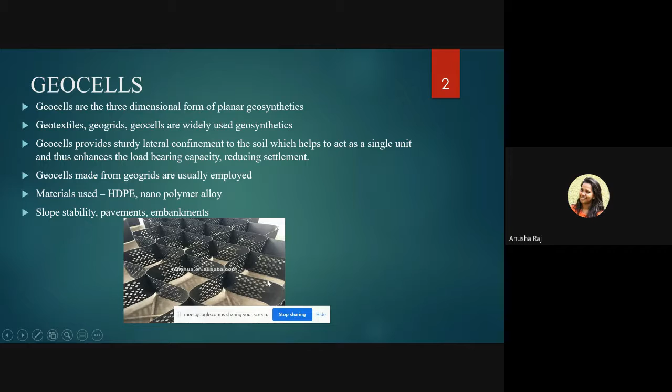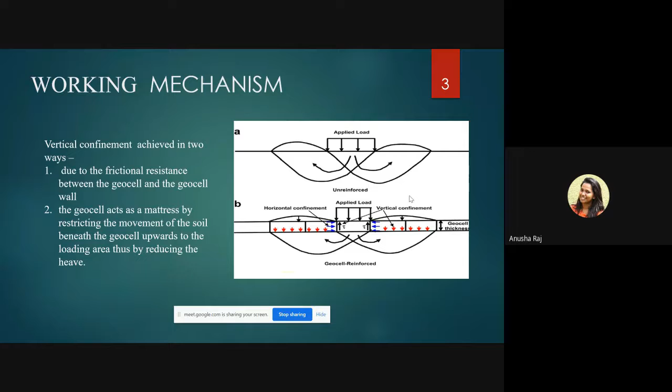The working mechanism of a geocell is that when the load is applied, it gives a frictional resistance between the geocell wall and the soil. Since it is confined, it has frictional resistance at the interface so that it can carry more load. The geocell also acts as a mattress, restricting the movement of the soil beneath it upwards to the loading area and reducing the heave.

Now there are a few parameters by which we can analyze the improvements made by applying geocells. Some of these parameters are bearing capacity ratio, improvement factor, and percentage reduction in settlement.

Basically, by reinforcing, what we need is more load carrying capacity and reduced settlement. So these are the two main factors we look for by reinforcing soil with anything.

The bearing capacity ratio is the ratio of ultimate bearing capacity of the reinforced soil to the unreinforced soil. The improvement factor is, at a particular settlement, the ratio of bearing capacity of the reinforced to the unreinforced soil. The percentage reduction is expressed as a percentage, showing how much the settlement can be reduced.

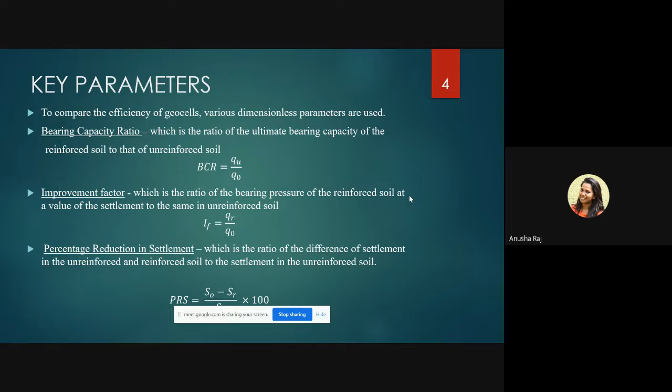Now, what geocells do we need, how do we select a geocell, and how do we place it to get optimum results? Various researchers have done studies extensively to find a range, since we cannot say there is one optimum value, because the soil, the type of geocell used, the type of footing used, and the function it is meant to serve all play a role. So we cannot give one single value, but we can say for sure that we can find a range within which it should be placed.

Some of these factors are the pattern in which the geocells have to be arranged - the chevron pattern gives the best values, but other patterns can also be used. There's also the depth of placement, which is the depth below the foundation at which the geocell gives optimum results, as well as the height of the cell, aspect ratio of the cell, and stiffness modulus of the cell.

Now, what happens with the stiffness modulus is that if we use a material with low stiffness, it will deform under the applied load, so the function of the geocell will not be met. But if we use a geocell with very high stiffness, there will be strain mobilization in the cell, and it can break due to higher loads. So we cannot use a lower stiffness material, and we also cannot use a high stiffness material - we have to find the right range of stiffness.

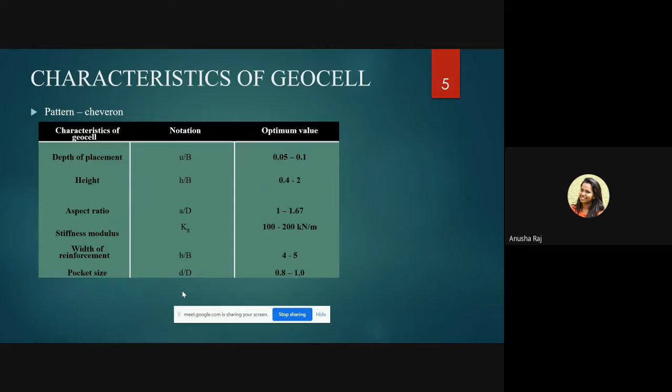Now, those were the characteristics of the geocell. The soil used to infill the geocell also plays a role in the reinforcing effect. The ratio of the cell size to the mean diameter of the soil should be 15.

These are all results from different authors, since not all factors can be found in one paper or one research work - it's basically a review paper. The ratio of cell size to the maximum diameter of the soil should be 7 to 11, the ratio of plate size to the mean diameter of the soil should be 20, and the internal friction angle should be in the range of 30 to 40 to give the maximum results.

The preferred infill soil is sand, as it gives a membrane effect - the soil particles come closer and become very confined, and when the load is applied from above, this gives an upward force to counterbalance that load.

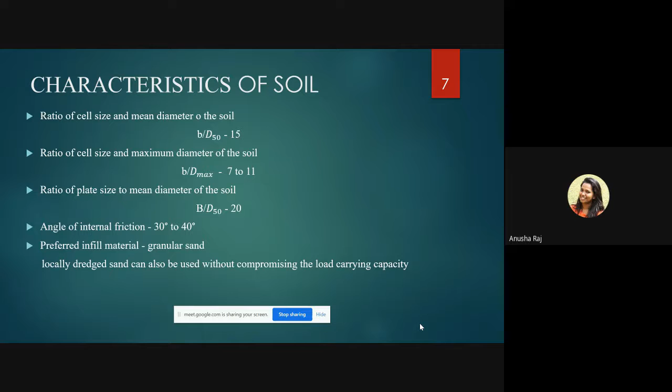That's a very good point, because if we had to use just a particular type of sand, it couldn't be a proper sustainable solution for the problem. So we've seen that we need not have a particular type of sand; we can use the locally dredged sand also.

Now there's a new advancement in the use of geocell. There is always a chance of the infill material seeping down, so the function won't be met. The additional planar reinforcement improves the load bearing capacity, as the downward movement of the infill material will be arrested by giving a planar reinforcement.

It is beneficial in the clay situation, and the bearing capacity ratio (BCR) was found to be 7 times that of the unreinforced soil.

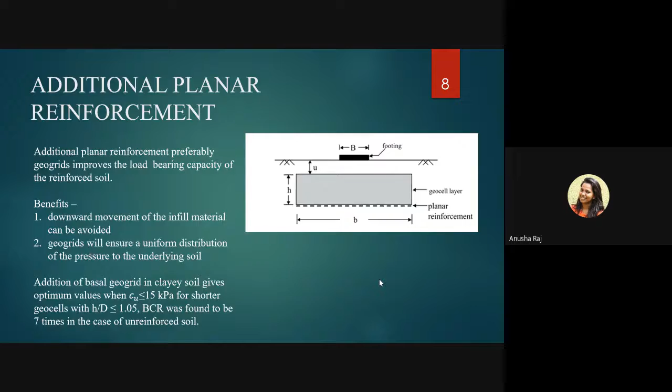When talking about these experimental results, with technology we have lots of software packages used in the geotechnical industry, and the limitations of laboratory work can be met in numerical analysis, since we cannot make a full model experiment.

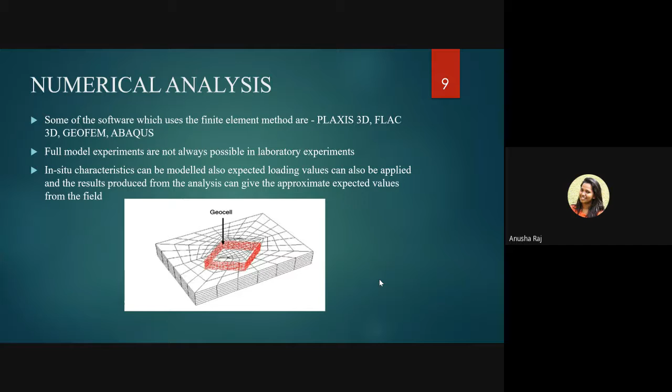Almost all the experiments agree with the numerical results also. So we can put the in-situ characteristics into the software to see how different materials react and interact with the load, and what range of results could be expected when applied in the field.

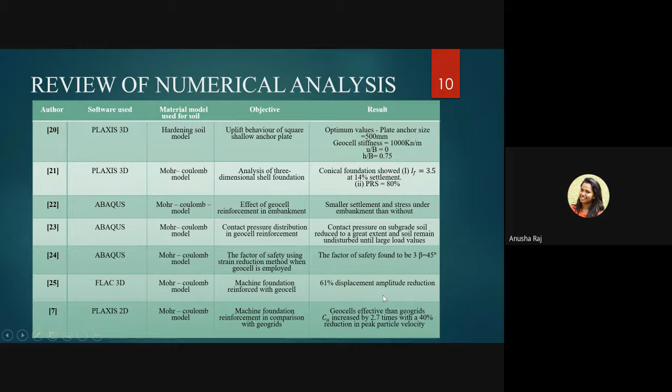So we come to the conclusion that geocells are very effective in stabilizing weak soil, and when geocell is reinforced with additional planar reinforcement, it gives better results due to the membrane effect.

The optimum values for various factors, when adopted, give a sturdy soil with large load carrying capacity and very small settlement. The numerical analysis with application of geocells can be simulated with the help of different software packages, and the results have been shown to agree with the experimental results.

The numerical analysis also helps in slope stability analysis, safe placement of anchor plates, and other structures. Though extensive theoretical study is done, practical application is limited.

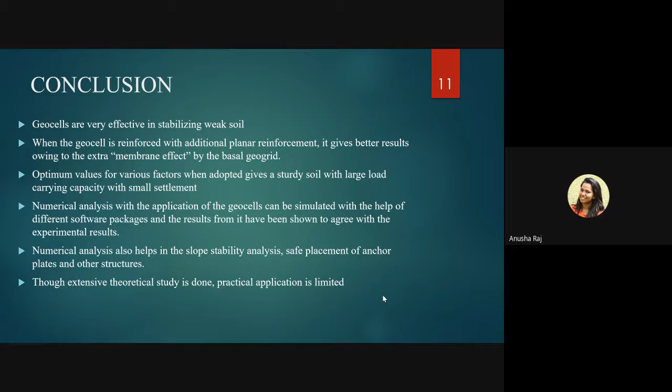Hello. Yes, sir. I think. Okay, and thank you, Ms.

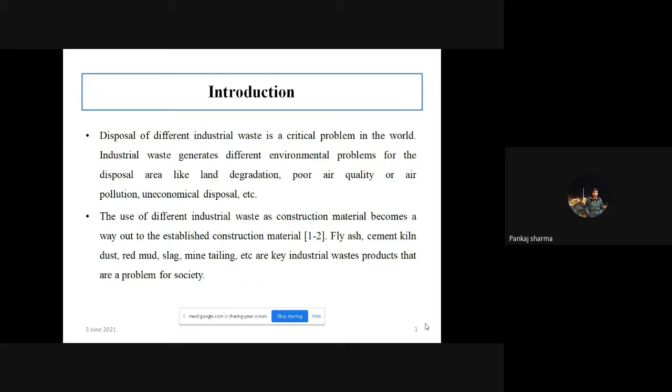There are different industrial wastes like fly ash, cement kiln dust, red mud, and mine tailing, etc. The consumption of industrial waste in the engineering fill and road construction has been of great interest throughout the globe. Scarcity of previously established construction material and reducing environmental impact render industrial waste as a substitute. Thus, in the present study, we are converting the waste into resource.

We also know that mechanically stabilized earths can be widely used in various geotechnical applications such as construction of embankments, pavement, and bridge abutments in soft ground. So we use different reinforcing fibers and sheets, and reinforcement material like soil nailing, etc.

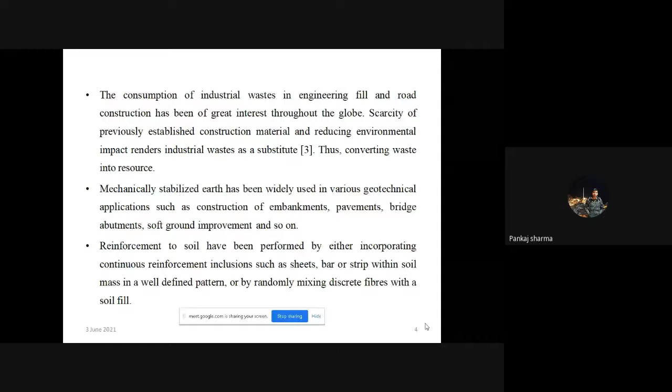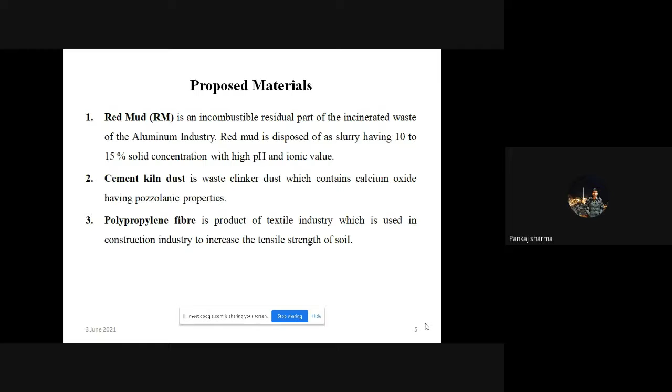In the present study, we are using three different types of material, in which red mud and cement kiln dust are the two industrial wastes of the alumina and cement industry. The cement kiln dust has a pozzolanic property which contains calcium oxide, which is the base of the cement industry, as an unburned or overburned dust of cement. Similarly, red mud is the incombustible base of the alumina industry, and polypropylene fiber is the product of the textile industry, which is used in the textile industry, or also in the construction industry for increasing the tensile strength of soil and concrete.

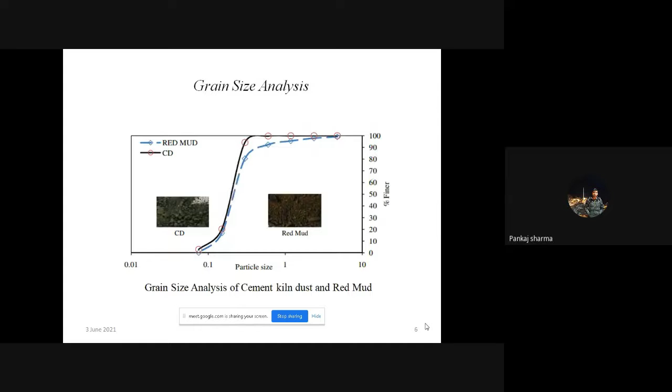Here is the grain size analysis for two different industrial wastes: first is our CKD, or cement kiln dust, and second is our red mud. From the curve, it seems like a poorly graded sand. This is not actually sand, but it seems like sand, having Cu and Cc values that lie in the range of poorly graded sand. The aspect ratio of the fiber is 600, having a length of 12 mm.

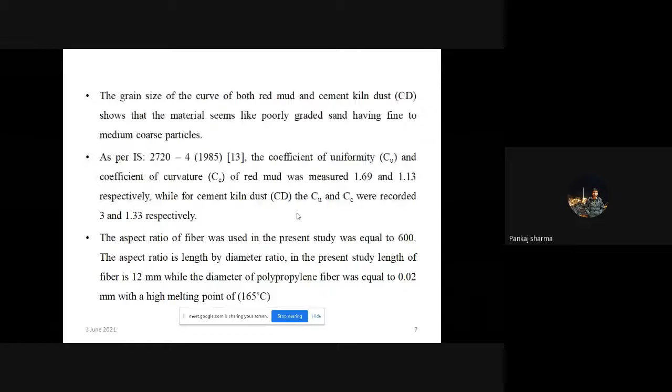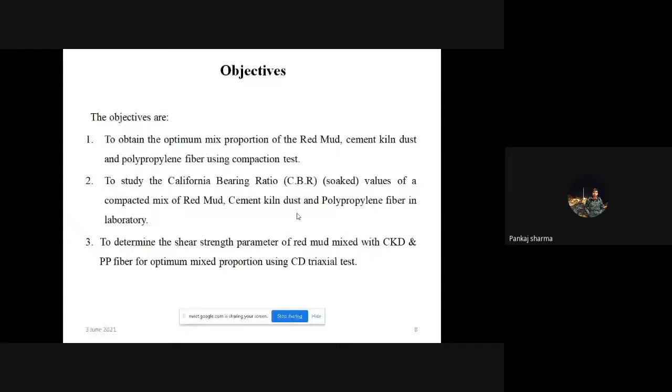The diameter of the polypropylene fiber is equal to 0.02 mm, having a high melting point. The objective of the study is to obtain an optimum mix by using the light compaction test. Similarly, to obtain the California bearing ratio capacity of different mixes, and to obtain the shear strength parameter of the optimum mix.

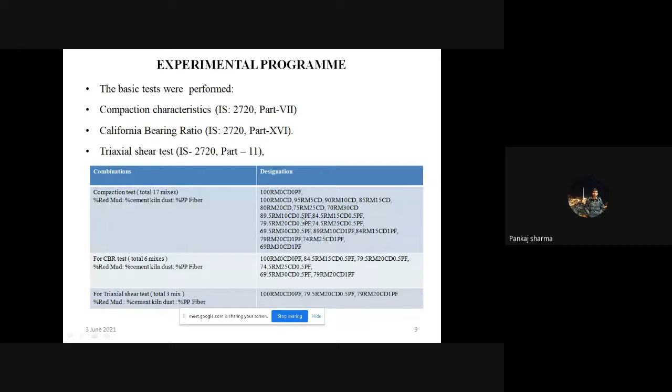From the result, first is the resultant discussion for the compaction test. From the curve, it seems like the dry density, with increase in water content, starts decreasing, and then starts increasing and attains its peak, which shows the bulking nature of the material. It seems like a sandy material which shows bulking behavior, meaning the density decreases up to some point, then attains its peak.

Then from the first graph, it is clear that the composition of 80% red mud and 20% cement kiln dust shows the highest maximum density among all different mixes. Then, when we add fiber to this percentage, it is clear that 79.5% red mud and 20% cement kiln dust with 0.5% fiber shows maximum density.

Further, when we increase the percentage of fiber up to 1%, it is clear from figure number 3 that our density starts decreasing, from 17 to 16. Then from the fourth curve, it is clear that the maximum dry density of the mix starts increasing with the addition of cement kiln dust up to 20%.

After 20%, the maximum dry density becomes constant. So we fixed the percentage of cement kiln dust at 20%.

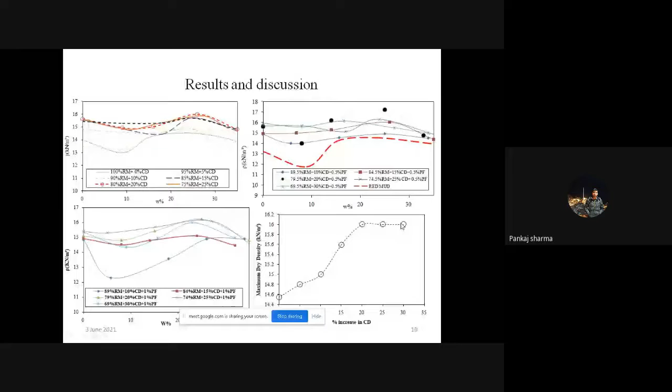As I already explained, the maximum dry density and optimum moisture content was recorded as 16 kilonewton per meter cube, or 1.6 gram per cc, at 28% optimum moisture content for the red mud and cement kiln dust mix.

Sorry. Hello sir, two more minutes please. Okay, you should wrap up within 2 minutes.

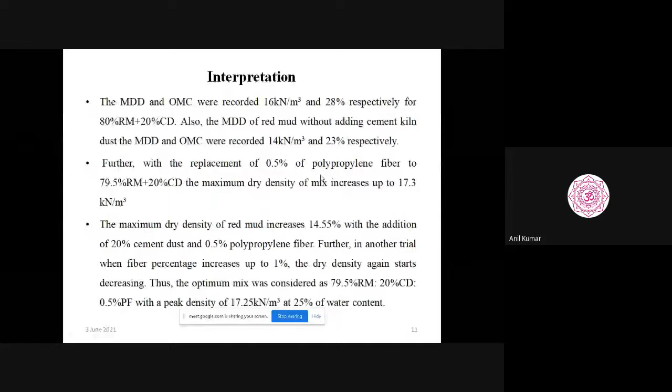The maximum dry density for the red mud without adding cement kiln dust is 14 kilonewton per meter cube at 23% optimum moisture content.

For the optimum mix, the maximum dry density was recorded as 17.3 kilonewton per meter cube. With addition of 1% fiber, the density decreases up to 16 kilonewton per meter cube, as I already explained.

With addition of 0.5% fiber, the density increases up to 14.55% relative to the existing mix.

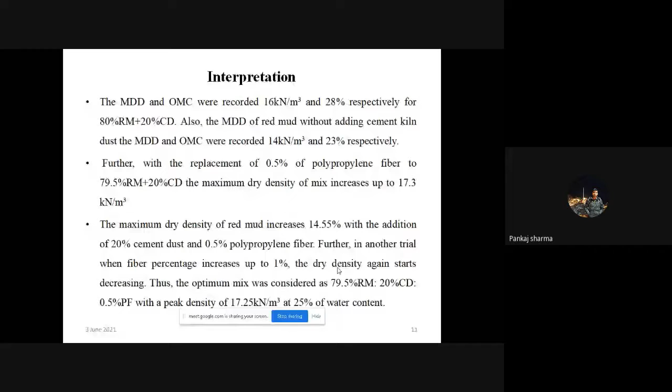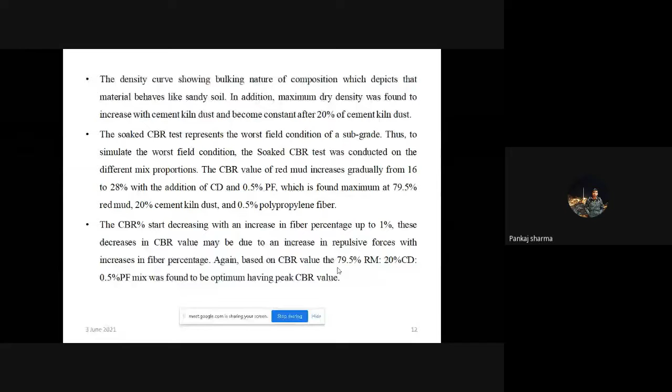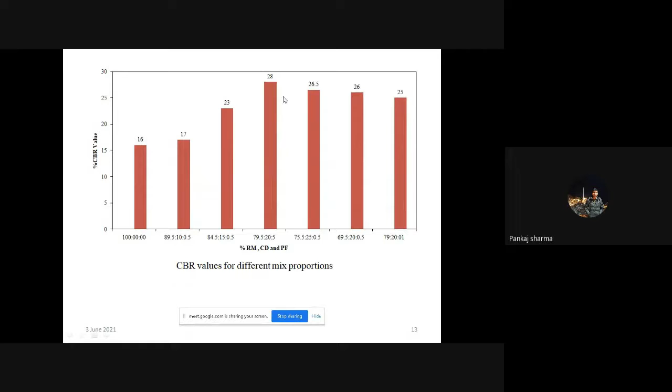We also conducted a CBR test for the mix. The CBR value increased significantly for the optimum mix, as clear from the figure. For the pure red mud, the CBR value was recorded at 16%, while for the optimum mix it increased up to 28%.

We conducted a CD test for the optimum mix and pure red mud. It is clear from the table that for pure red mud, the cohesion value was recorded as 12.5 and the phi value was 24.22.

For the mix with 0.5% fiber, the C value increases up to 45 and the phi value increases up to 43.7. With further addition of fiber up to 1%, the C value and phi value start decreasing, as clear from the table.

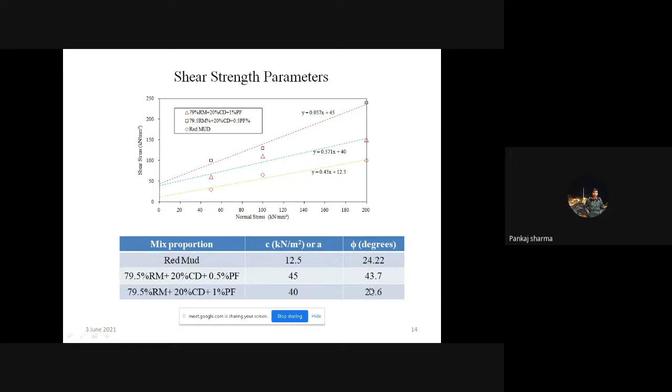We also conducted the EDX test for the different waste products.

Yes sir, please go to your conclusions. Yes sir, now the last slide.

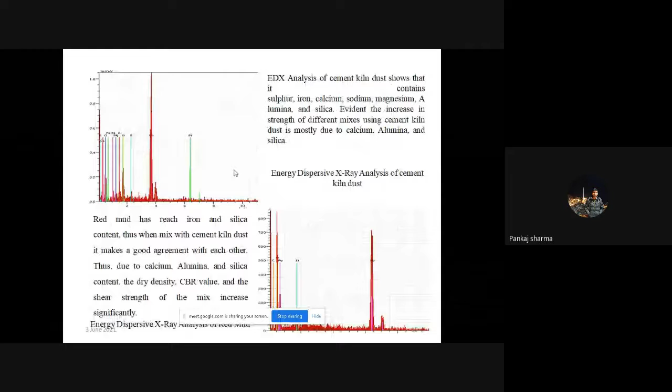Hence, from the conclusion: for red mud, the maximum dry density and optimum moisture content was recorded as 14 kilonewton per meter cube and 23%, which is further increased up to 17.3 kilonewton per meter cube at 25% moisture content.

Hence, 17.5% red mud and 20% cement kiln dust with 0.5% fiber is recorded as the optimum mix. Also, the shear strength parameter was found maximum for this mix.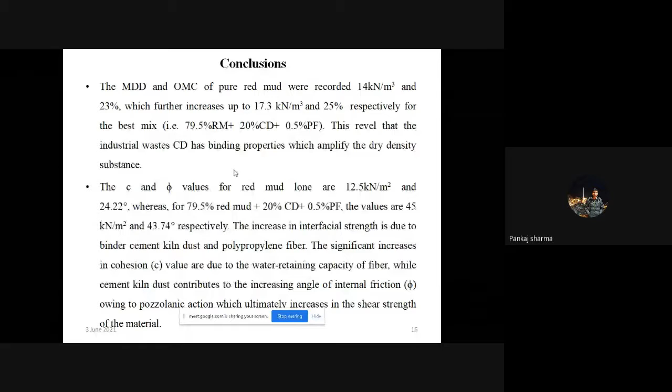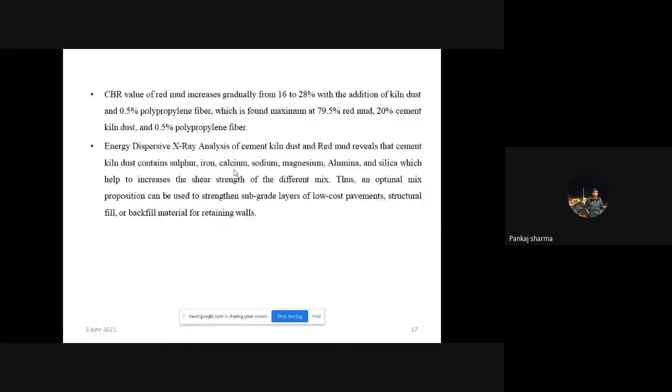The CBR value also increases from 16% to 28% for the optimum mix. Also, the energy dispersive X-ray analysis shows that cement kiln dust and red mud...

Hello Mr. Pankaj. Thank you, thank you very much. Okay.

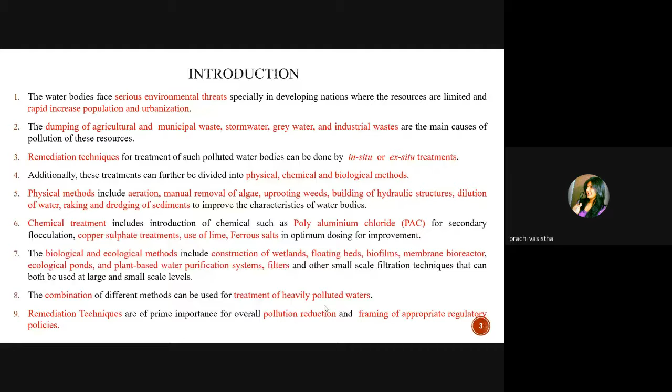The biological and ecological methods include construction of wetlands, floating beds, biomembranes, etc., and plant-based water purification systems, which can be installed on small and large scale for improvement in the overall quality of water bodies. These techniques can be used singly or in combination with each other for the treatment of heavily polluted waters.

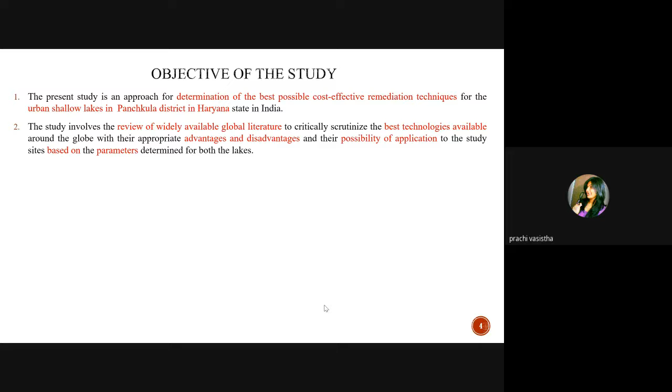The remediation techniques are important for overall pollution reduction and framing of appropriate regulatory policies. The objective of the study is the determination of best possible cost-effective remediation techniques for urban shallow lakes in Panchkula district of Haryana. The study involves review of widely available global literature to determine the best technologies available based on advantages and disadvantages, parameters, and possibility of application.

The physical methods include aeration, sediment dredging, hydro raking, vegetative buffer and riparian zone stabilization, and ripraps, whereas chemical methods include optimum dosage of chemicals in the lake water body, such as alum, phoslock, modified zeolites, ferrous iron salts, copper sulfate, and calcium-based compounds.

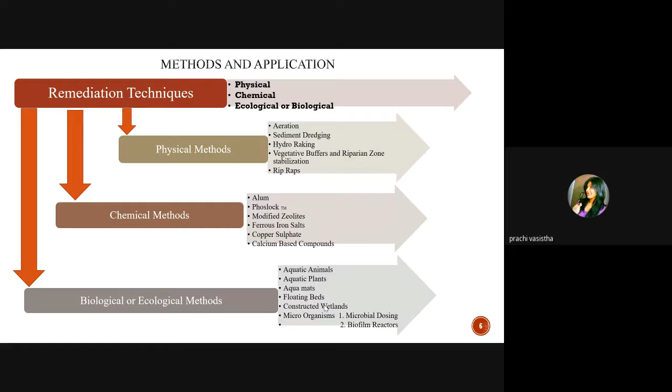The third method is biological or ecological, which involves use of aquatic animals, plants, aquamats, floating beds, construction of wetlands, or optimum dosage of microorganisms directly, called microbial dosing, or in form of thin films, called biofilm reactors. These are the various methods discussed and utilized for seeing the conditions for suitability of our study site.

First is aeration, which was found to be suitable for our sites, the reason being the BOD, COD, and DO. The DO levels in the hypolimnion, that is the base of the lake, was found to be lesser, which certainly makes it a suitable condition for a suitable technique for remediation in our study site. It offers long-term benefit and also reduction in nutrient concentration.

The second technique is riprap, used for stabilization of banks and preventing erosion, but it increases the water temperature by reflection of sunlight into the water, thus harming aquatic plants and wildlife, so it was not applicable at the site. The third is chemical phoslock, which was not applicable due to toxicity reasons.

The fourth is calcium-based compounds. Since the pH of the water increases and our pH was found to be between 6 and 8 towards the alkaline side, the products were not feasible for the site. The modified zeolites were not applicable to the site due to being costly.

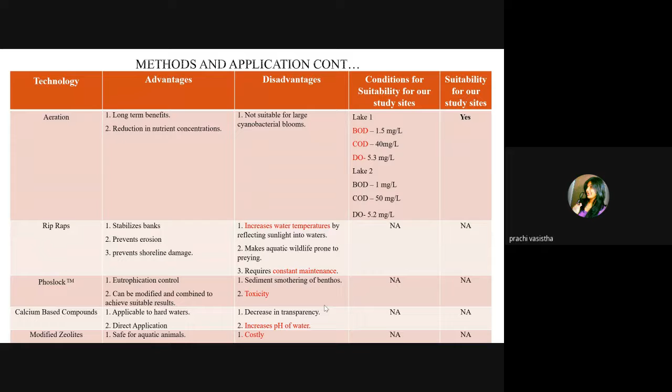The next is aquatic animals. Since the lakes are being used for pisciculture, the use of targeted animals and fish such as carps can be done for controlling excessive phytoplankton and improving water quality.

The next is aquamats, which requires constant maintenance and was not applicable to the site. The next is constructed wetlands. It requires large area, and since our lakes are shallow and small in area, it was not applicable.

The next is microorganisms, which is direct application. Due to limited remediation achieved and inefficiency for many parameters, this remediation technique was not applicable to the site. The next is biofilm reactor, which requires extensive construction work, and therefore it was not applicable to the site.

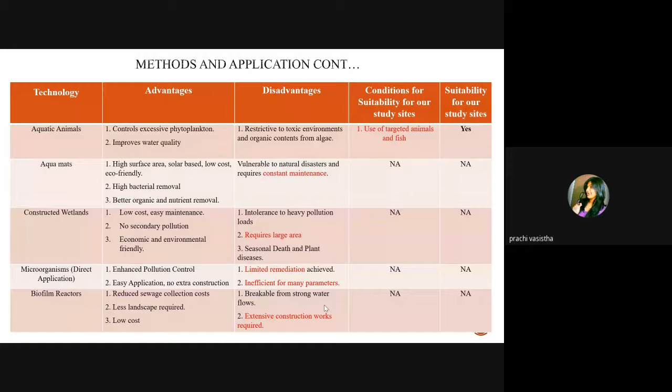The three applicable remediation techniques decided were: first, sediment dredging, which improves the water quality and reduces internal loading and sediment release. It is applicable for small and shallow lakes, and since our nitrate and TP were less, constant removal of sediments from the bottom of the lake through dredging was possible and applicable.

The next is vegetative buffer and riparian zone stabilization, which prevents sediment inflow, promotes native vegetation growth, and also provides shading to aquatic animals from high temperature and predators.

So due to low slope stabilization, constant soil erosion from the bank, and high sedimentation rates from the watershed areas and the banks, this technique was suitable for remediation on our site.

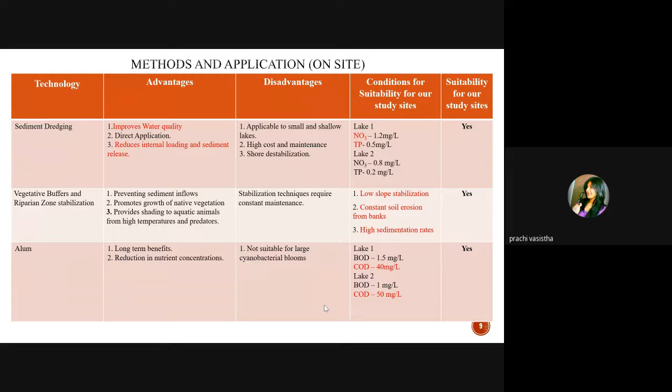The last was alum. It provides long-term benefits and has been used for many years. It reduces nutrient concentration, and since our site does not hold any large cyanobacterial blooms, it was applicable to our site. The COD level was 40 milligrams per liter, which was higher than the BOD level and confirms the inorganic content in the water. The flocculation and coagulation capacity of alum can be utilized for the water of the site to improve the condition and for the remediation of the lake water.

The critical discussion: since this is an urban shallow natural lake, a tremendous amount of sedimentation was observed in the lake. Prachi, I think you are exceeding your time limit, so you might just come to your major conclusions for the presentation. Okay sir, so last slide.

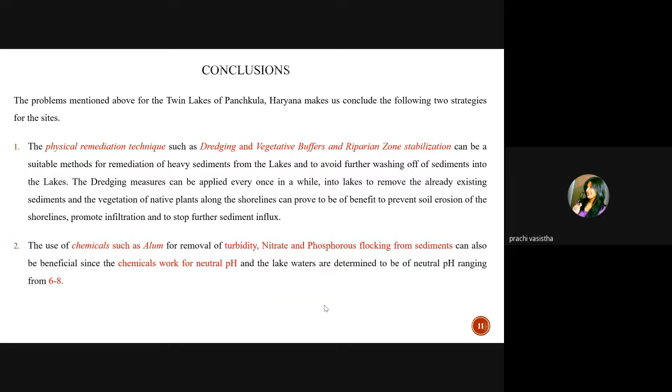So the main problem was sedimentation and a slight increase of nutrient levels. What we concluded was that the physical remediation techniques of dredging and vegetative buffer and riparian zone stabilization were the two physical techniques that can be easily applied to the lake for remediation. Chemicals such as alum can be used for reducing turbidity, nitrate and phosphorus from the lake sediments, since it works best at neutral pH, and our pH was between 6 to 8. So the chemical works best for the site. Thank you.

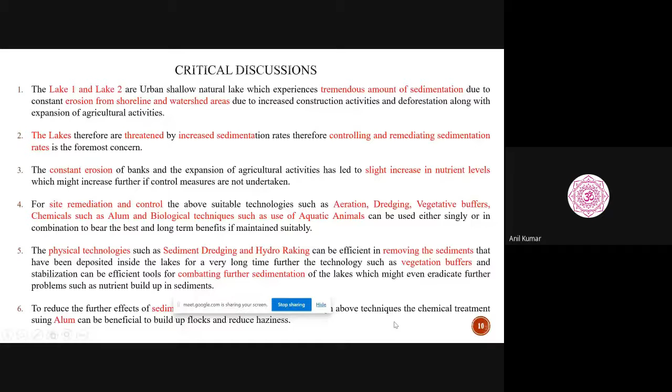Well, I think none of us have any questions. Okay sir, thank you so much. Can I ask one question? Yes sir, sure. So, which two lakes have you considered in Panchkula? Sir, I'm unable to hear your question, kindly please repeat your question.

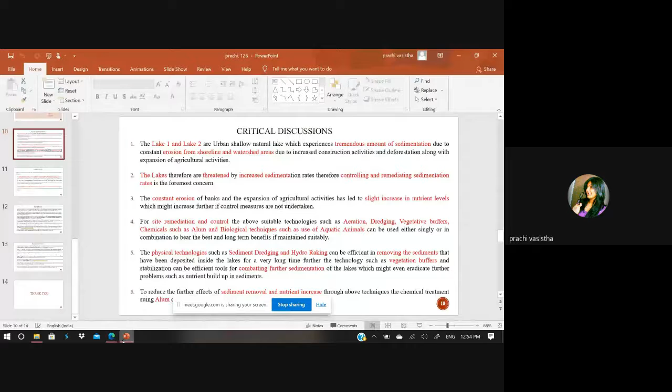Do you think the runoff getting into these lakes during the rainy season affects the study? So the sediments are usually more in the rainy season, but due to anthropogenic activities and various construction activities in and around the lake, there is a regular inflow of sediments from the watershed areas as well as the slopes of the banks, since the slope of the banks have not been maintained by the government.

Okay, so those sediments are going to affect the study? Yes sir. The sediments are a natural site for bonding of various nutrient concentrations, and therefore these sediments cause problems such as algae growth, cyanobacterial blooms, and harm to aquatic wild animals and plants. Also sir, the lake depth has been considerably reduced over the past few years to a very high amount. The depth has reduced from 10 meters to almost 5 meters. Okay, that's a huge difference. Yes.

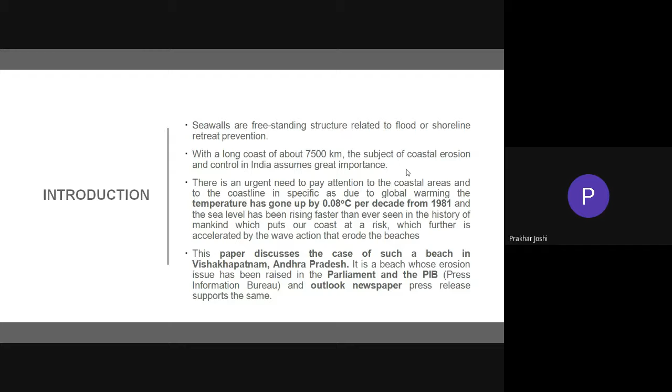This paper discusses the case of a beach in Visakhapatnam, Andhra Pradesh, where erosion is happening. It is a beach whose erosion issue has been raised in Parliament, and the Press Information Bureau and Outlook newspaper press release support the same.

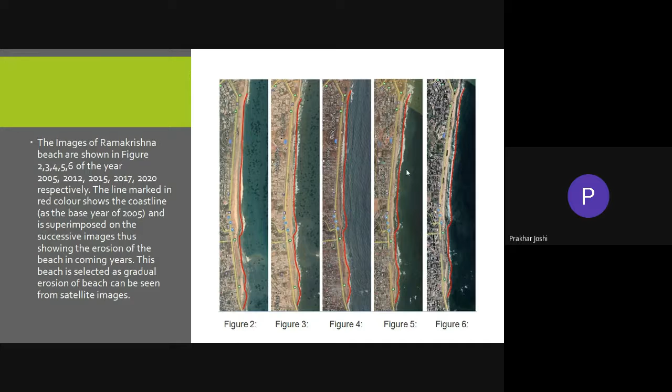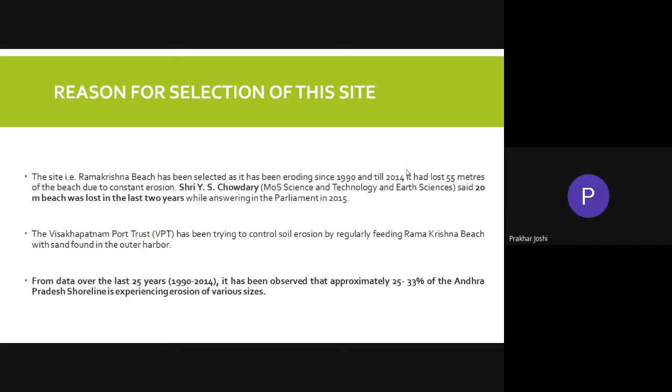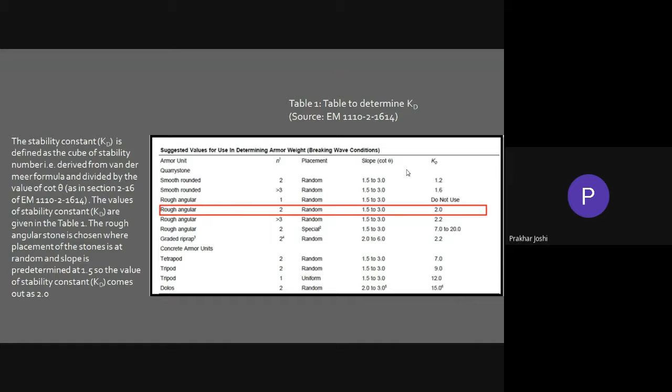Now we'll come to our seawall design. These are some prerequisites: KD, the stability constant, is defined as the cube of the stability number derived from the Van der Meer formula, and it is taken as 2. Rough angular quarry stone is taken for the armor unit. K delta, the layer coefficient, is taken as 1.

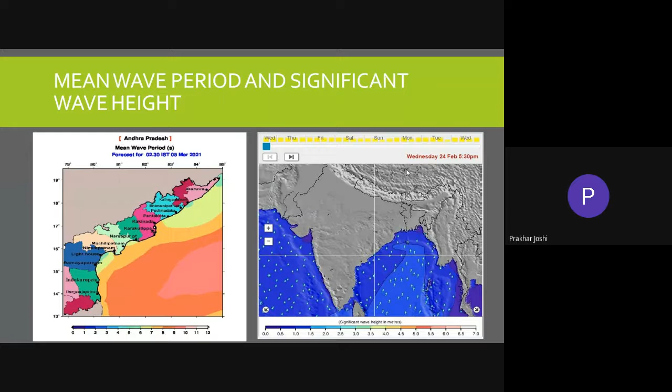For the design conditions, the time period has already been explained. The specific gravity of armor is 2643 kg per meter cube, as shown in the calculation. Specific gravity of seawater is 1025 kg per meter cube. The slope is 1:1.5, so cot theta comes out to be 1.5. Significant wave height is 1.516, wave height is 2.516, and depth of water is 2.516.

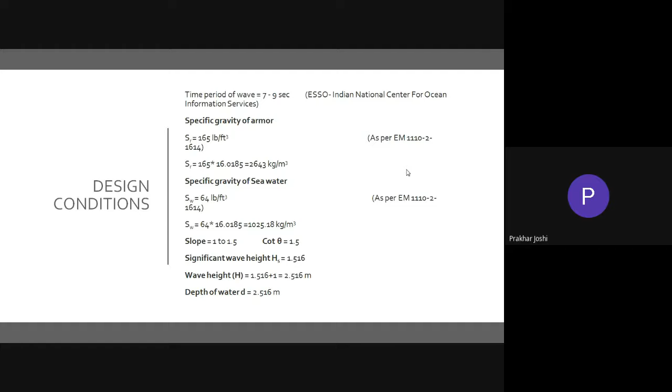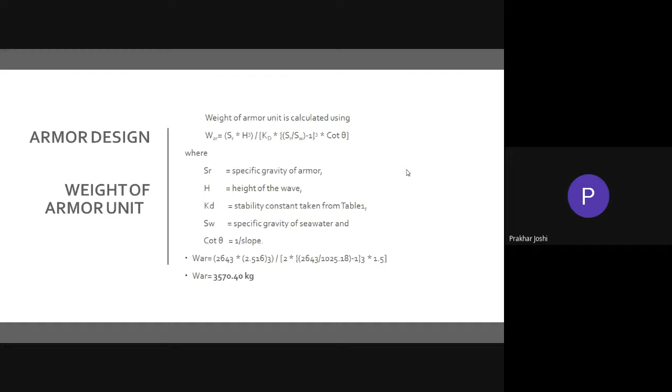Coming to the armor, the first element, the weight of the armor unit is decided through this formula: SR into H cube upon KD, SR by SW minus 1 whole cube into cot theta, where SR is specific gravity of armor, H is height of wave, KD is stability constant taken from table 1 as explained earlier, SW is specific gravity of seawater, and cot theta as defined. The weight of the armor comes out to be 3570.40 kg.

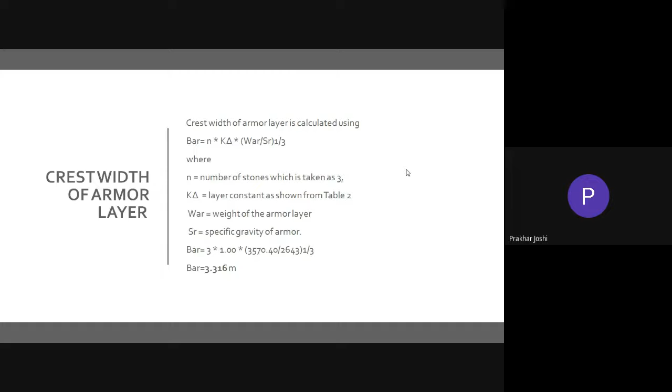The crest width of the armor is taken as N into K delta into W armor by SR, whole to the power 1 by 3, where K delta is the layer coefficient as already explained. The crest width of the armor layer comes out to be 3.316 meters, and the thickness is calculated using the formula N K delta W armor SR, whole to the power 1 by 3.

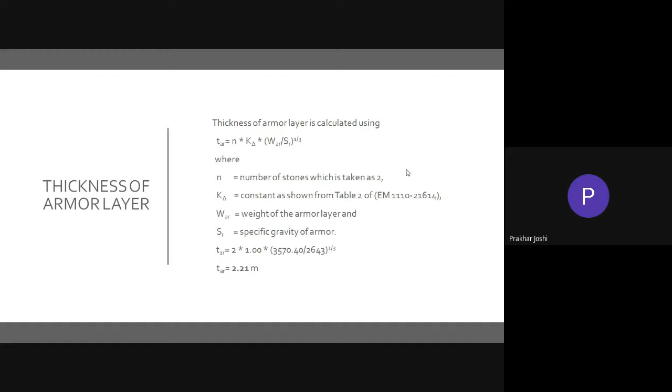Here N, that is the number of stones or number of stone layers, is taken as 2, and the thickness comes out to be 2.21 meters.

The underlayer is designed as 1 by 10 to 1 by 15 times the weight of the armor unit, considering the stability of the RC wall. So the weight of the underlayer comes out to be 357.04 to 238.02 kg, and the thickness of the underlayer is equal to the thickness of the armor, which is 2.21 meters.

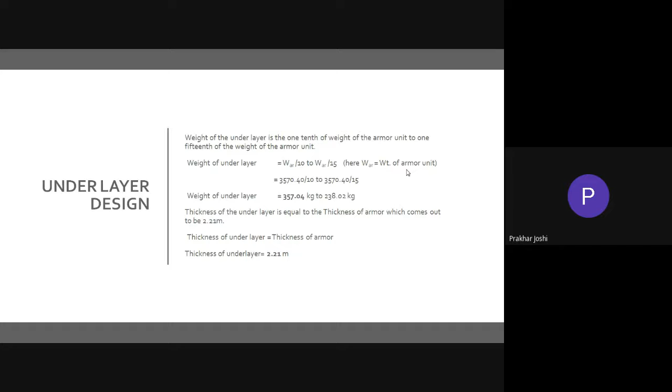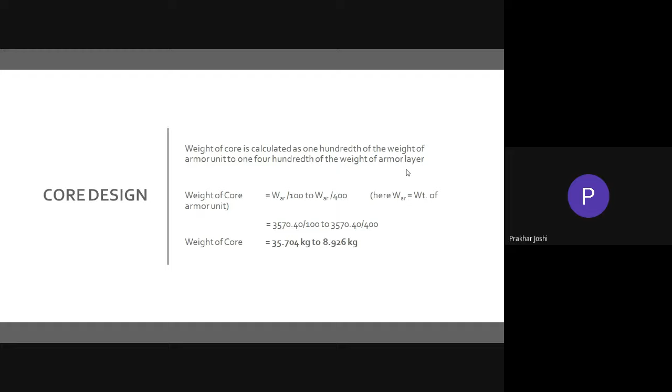The third element is the core design. We have designed our core to 1 by 100 to 1 by 400 times the weight of the armor unit. For the stability measures, the weight of the core is 35.704 kg to 8.926 kg.

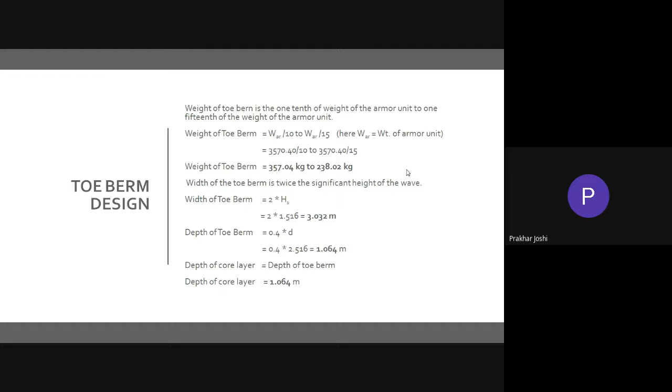The toe berm design: weight of the toe berm is 1 by 10 to 1 by 15 times the weight of the armor, which comes out to be 357.04 kg to 238.02 kg. Width of the toe berm is 2 times the significant wave height, coming out to 3.032 meters, and the depth of the toe berm is 0.4 times the depth of water, which is 1.064 meters. The depth of the core layer is also 1.064 meters.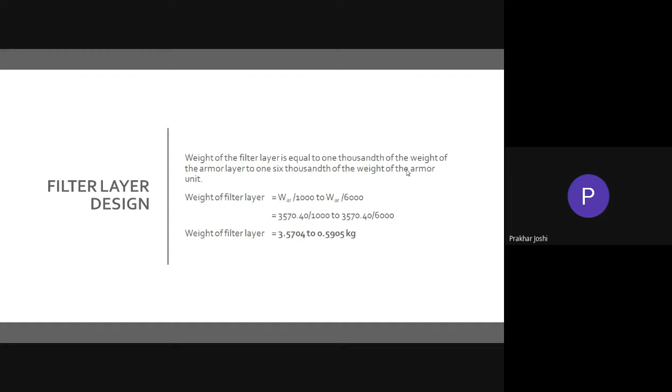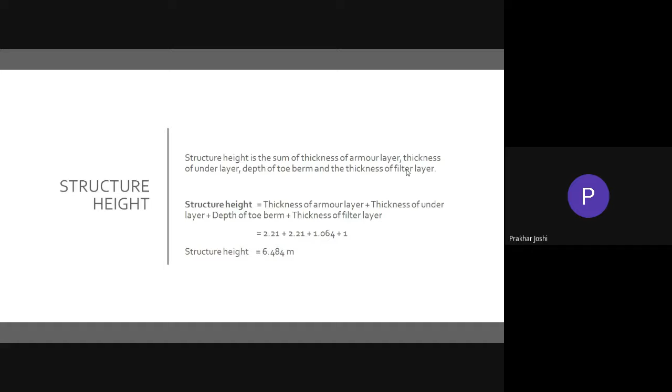The fifth and final element is the filter layer design, whose weight is 1 by 1000 to 1 by 6000 times the weight of the armor unit, giving a weight of 3.5704 to 0.5905 kg. The cumulative height of the structure comes out to be 6.484 meters, as shown in the above calculations.

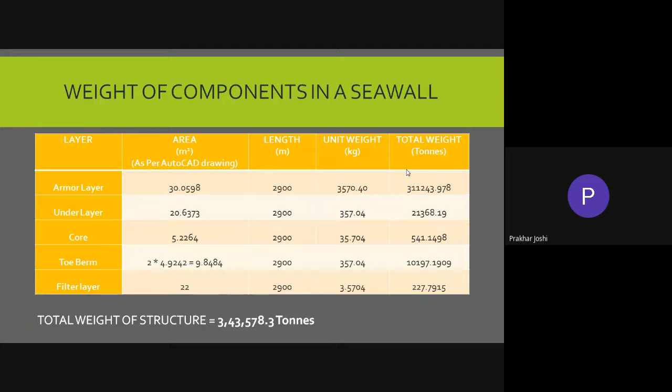The conclusions are: as we know, Ramakrishna Beach is near Visakhapatnam port, so it is densely populated, and due to its close proximity to Visakhapatnam port it is of much economic importance. The road seen in the earlier image is also a strategic road connecting Visakhapatnam port to the interiors of Visakhapatnam, so this seawall will also protect it.

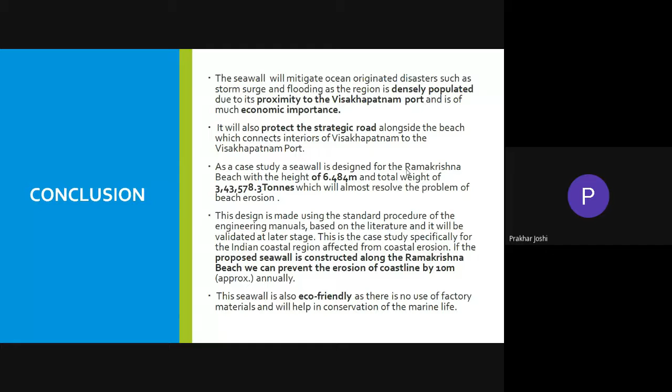The seawall's weight and height are 3,43,578.3 tons and 6.484 meters. This design is made using standard procedure of an engineering manual. If the proposed seawall is constructed along Ramakrishna Beach, we can prevent erosion of the coastline by approximately 10 meters annually. The seawall is also eco-friendly as there is no use of factory materials, and it will help in conservation of marine life. Thank you.